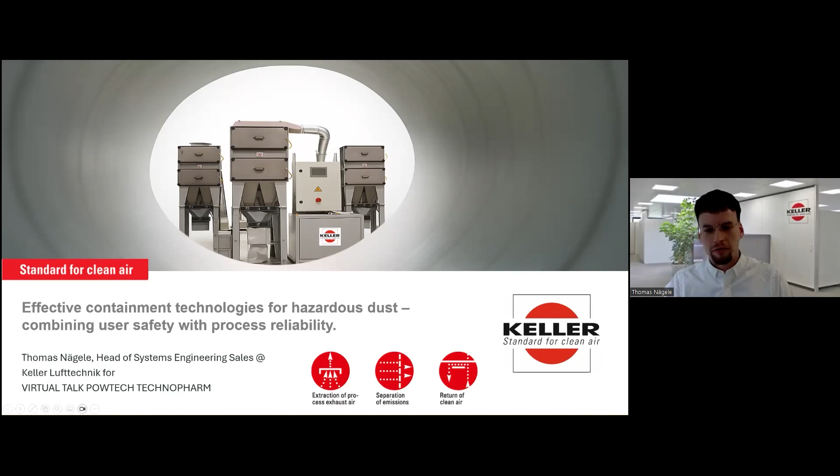On the other hand, we have a very high risk of cross-contamination, which can also cause big issues, even in the pharmaceutical industry. If the process is not working well, if the machine is dirty all the time, you get an additional risk of explosion, so you have to consider ATEX regulations, but you also have a big risk of wear of your machines, so you have very, very high maintenance efforts, cleaning efforts, and so on. For this reason, it's very important to have an overall look over the process, over all your systems, to get a solution that fits your needs, which is cost effective, but doesn't have any lack of health insurance for your workers.

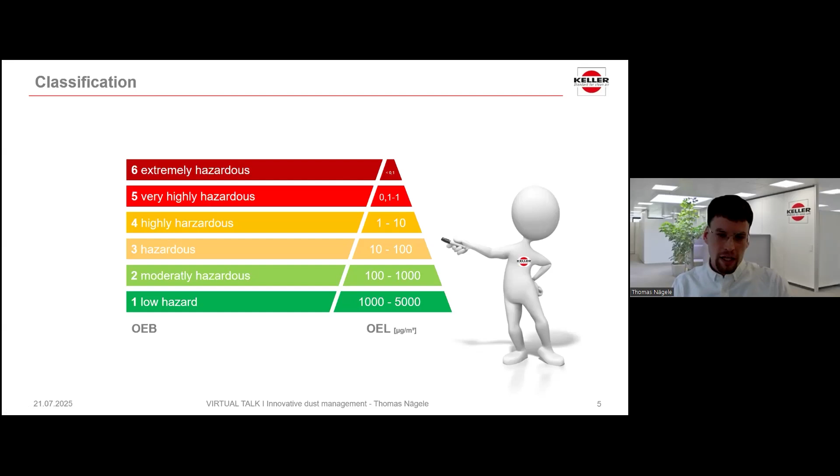Because it's much easier for their workers to say, hey, we have a new substance here in our factory and our laboratory, it's classified as OEB 3, for example, or 4, than to say, hey, we have a new substance here with an OEL level of 25, for example. Everyone knows what to do if he has an OEB level of 4. So this is the classification of dust for health. And then we have another classification, and this is the ATEX classification of your dust.

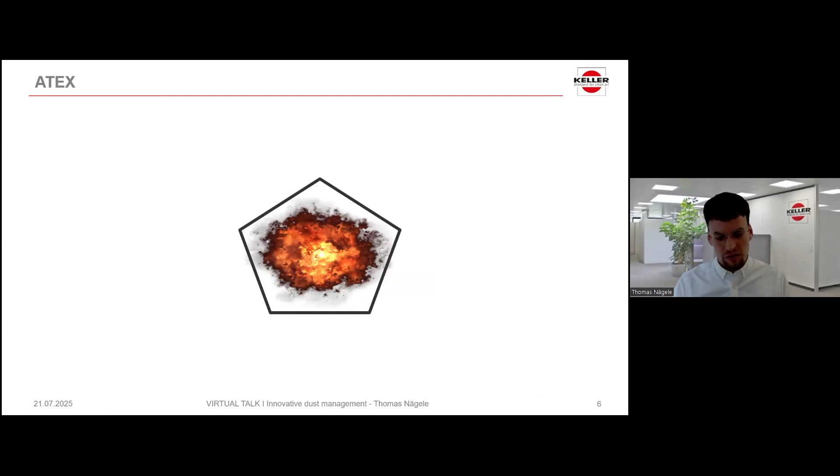First of all, what do we need to have an explosion? I'll start from the very beginning. For sure, we need a substance that's combustible. Then, for sure, we also need a sufficient degree of fineness. Everyone knows this. The correct mixture. Then, for sure, a source of ignition and oxidizing agents. If those 5 come together, for example, in a filtration unit, they can cause an explosion there.

So we try to cross out one of those points to make sure that no harm to your workers will be done. If we can't cross out one of those, maybe the source of ignition, because of a very low minimum ignition energy, we have to design the filter in a way that it's still safe for everyone to work around. So if you want to have a safe production from our side, you need to know some specific values of your dust. For example, as I mentioned before, the minimum ignition energy, to decide whether we need explosion protection or not. And then for sure, KST values and the maximum pressure for your dust.

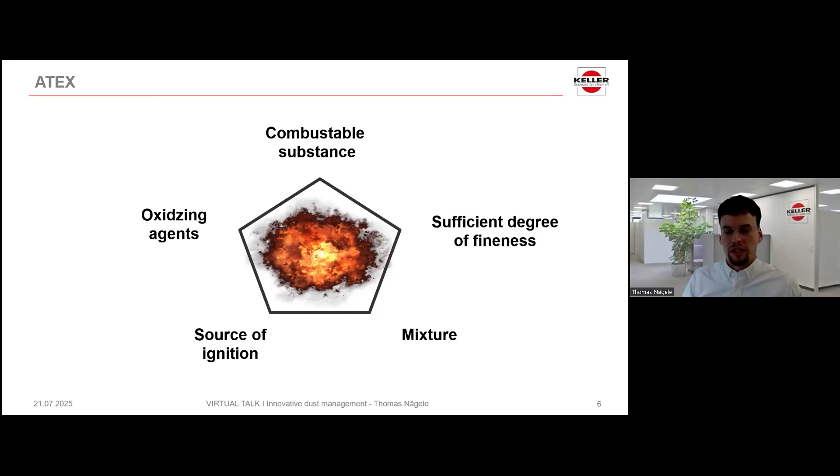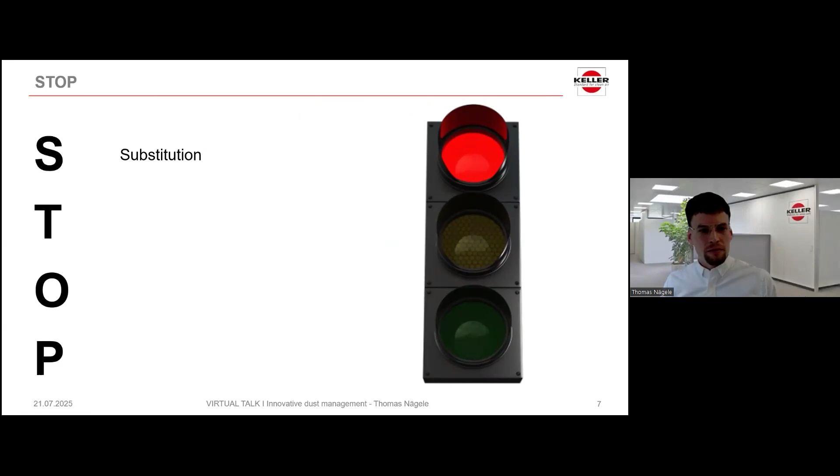So how do we bring this in? As I mentioned before, it's an overall process. The customer needs to have a look over his whole production. And there we start with STOP. The STOP principle means, first of all, you have to substitute the most dangerous substance. Then you can go for technical protective measures, then organizational protective measures, and at the very end, the personal protective measures come into account.

Since we as a filter manufacturer are only a small part of this STOP principle in the production of our customers, we are not able to substitute the most hazardous dust, for example. We concentrate on the T, on the technical protective measures, so that we bring in one of the several pieces the customer can rely on: the most up-to-date technical device with very low organizational protective measures and the least personal protective measures.

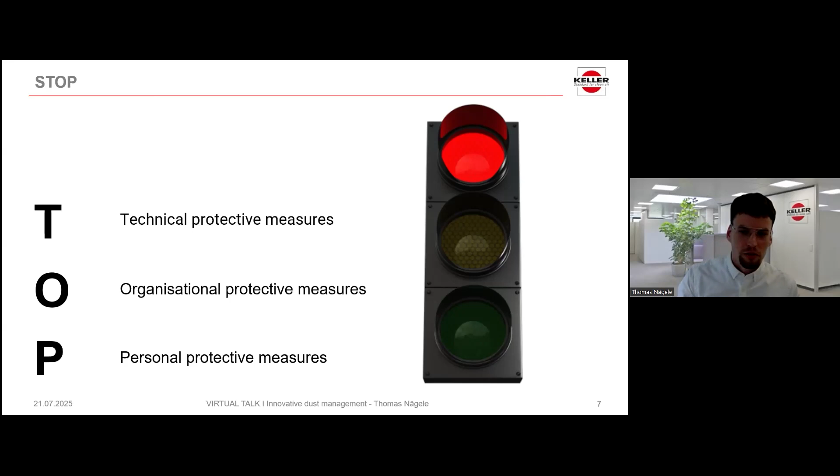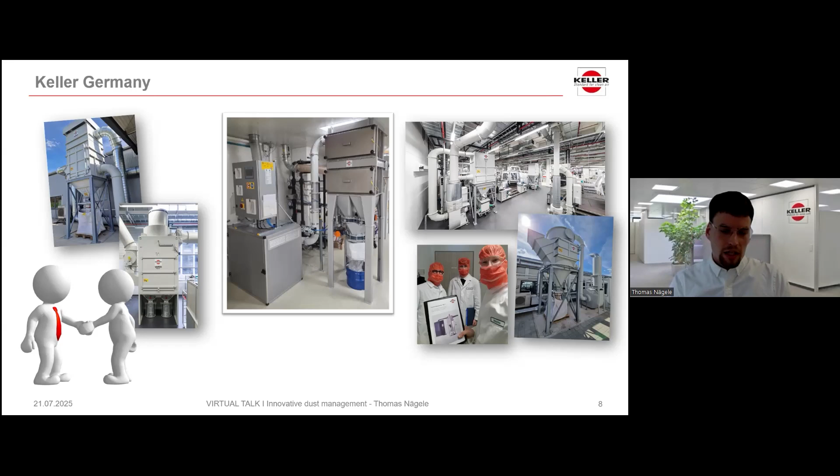So this was a quick overview of the hazards that we have in a production where a lot of dust can be exposed. We talked a lot about we, but who is we? We are Keller Germany, a filter company founded in 1903 in Kirchheim-Teck, close to Stuttgart. We have our knowledge spread over 350 employees. Our in-house mechanical and electrical engineering department brings your vision and requirements as a customer into a working product, and our installation and commissioning guys make sure that the system is installed correctly, according to the most up-to-date guidelines, and is running like 50,000 systems over the world do right now.

As I mentioned, our head office is located in Kirchheim-Teck, but with our subsidiaries in China, the US, and Switzerland, we are always close to our customers to provide the engineering knowledge needed for specific markets, so that the local regulations are met, no matter US, China, and so on. An additional very important point is service time. If we brought our service only from Germany, we would have very long travel times. So our guys in the US, China, and Switzerland have their own service department that provides very short lead times for all of our 2,500 satisfied customers worldwide.

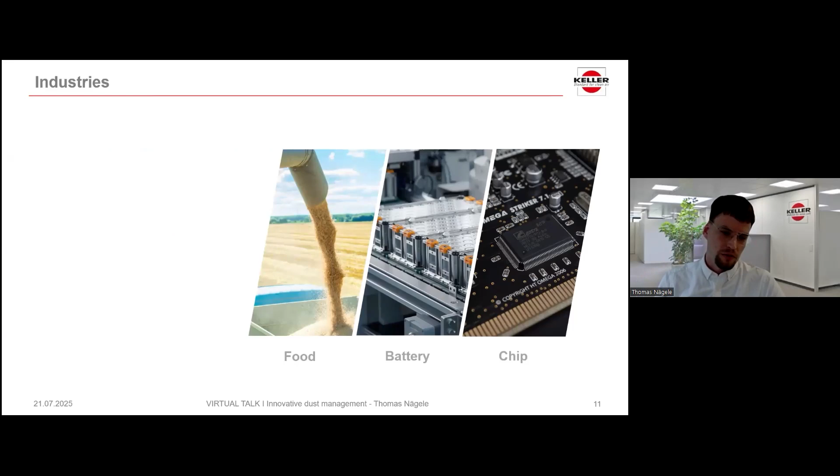Those customers are divided into several industries. Just a quick overview of some. We have, for example, the chip industry in wafer production; the battery industry, with slurry mixing, battery assembly, and battery manufacturing as an overall process. Then the food industry, where our filters are used for truck loading, ship loading, and so on. Then the chemical industry, for compounding plants, plastic plants, paint production, and mixing, weighing, and feeding for epoxy production. And last but not least, the pharmaceutical industry, and many more.

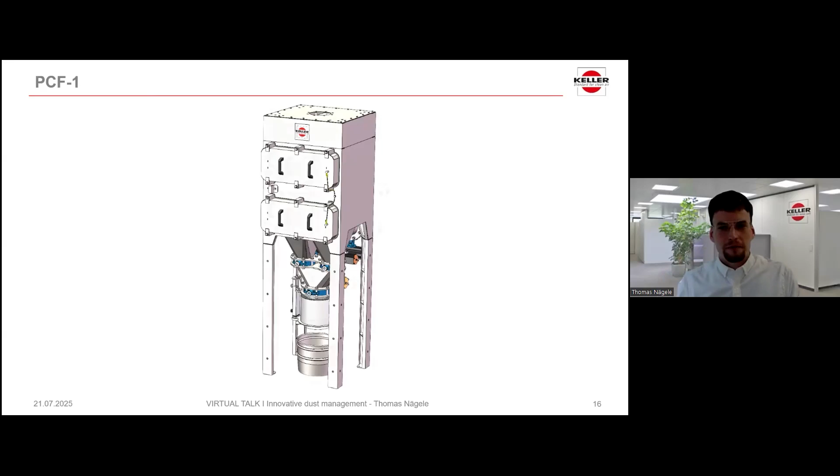And since we recognized that, especially in the pharma, chemical, and food industries, we decided to bring out our new filter, the PCF1, that meets the requirements there, with the small airflows needed, and is able to handle very highly potent substances up to OEB5 level. Inside we have 2 HEPA stages. The first one is a pulse jet cleanable HEPA stage. The second one is a secondary stage in case the first one has an issue, for example.

For the disposal, we have talked to several customers and we have focused on the endless liner system compared to several other possibilities that we have, or we could have installed, like a bag-in, bag-out with the O-ring system, but we decided to go for an endless liner system because of the easier handling, and the focus was there on the daily doing of the workers.

For sure, the O-ring handling is fine for the HEPA stages if they have to be changed, in our case, once a year, depending for sure on the process and the dust that's coming from. But the daily handling, the maintenance guys' daily work was very in focus for us, so they shouldn't need 5 to 10 minutes to change the full bag on the bottom, but 1 minute should be the maximum time

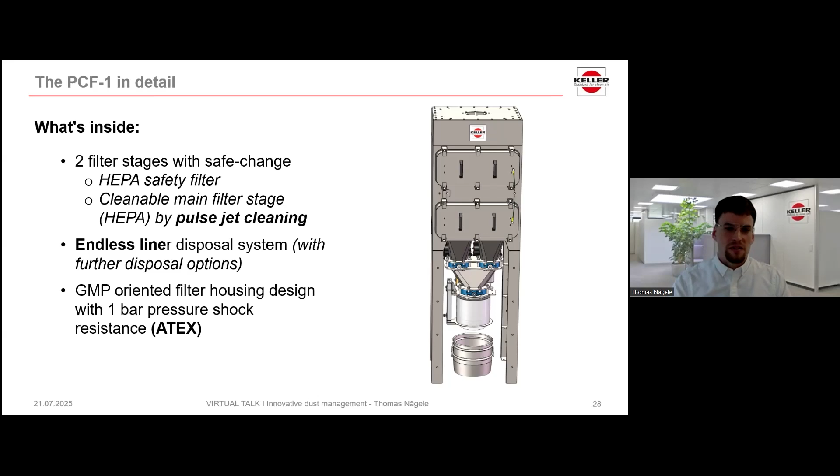that they should use. And this, for sure, GMP orientated, with a GMP orientated filter housing made in carbon steel, made in stainless steel, depending on the needs of our customers, up to 1 bar pressure shock resistance. So also suitable for ATEX dust.

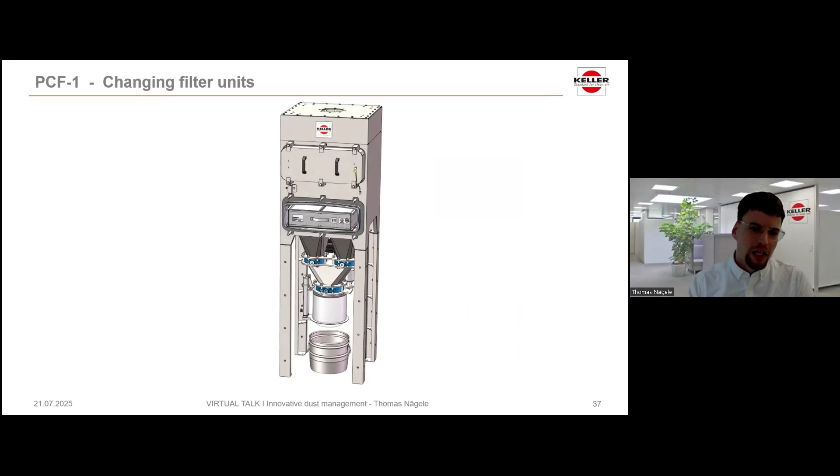Changing the filter units, easy bag-in, bag-out system. This animation doesn't show the bag at the moment, otherwise you wouldn't see anything. Filter elements out, new one in, and the same with the endless liner unit. Big benefit of the endless liner unit is you have the O-ring handling just once a month, and the daily change, as I mentioned before, is done in a very, very short time.

1 minute. You just have to toss down the endless liner, crimp it with a Lugaya system, depending on the OEB level that is required for your process and for your personal safety. But with a Lugaya system, we can go up to OEB 5. Just toss it down, crimp it, and production can go on, and this is done in less than 1 minute.

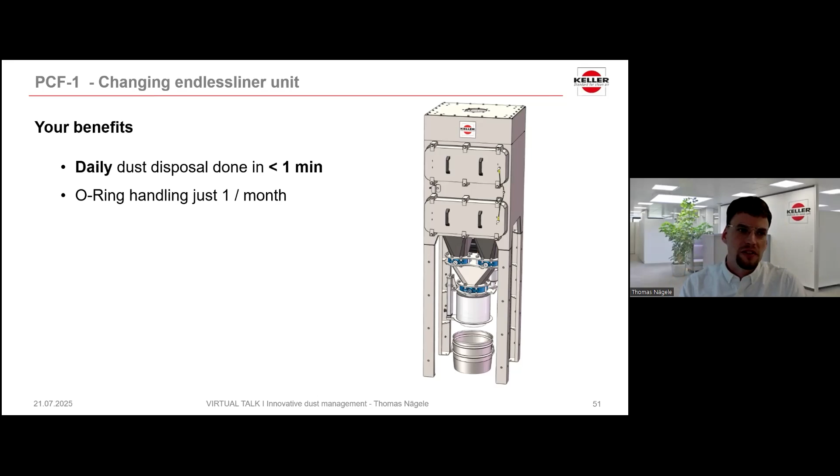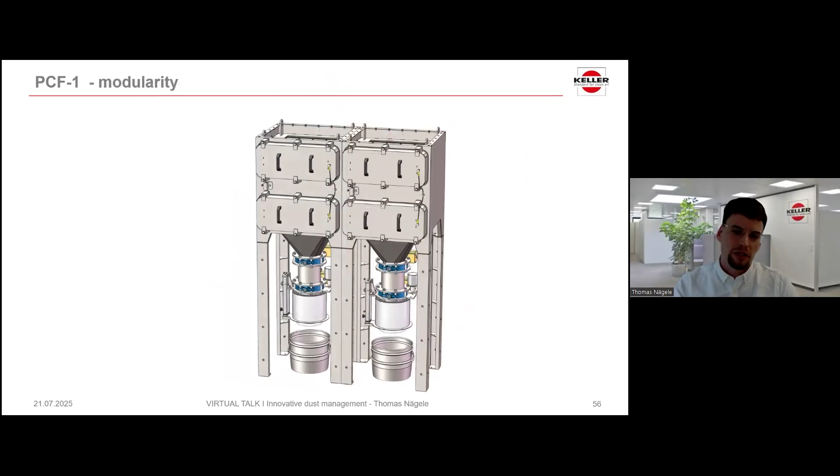And I've mentioned the modularity, or the small airflows that the PCF1 is designed for. So we can bring it up with a top-mounted fan. If we do not have the height, we can place the fan beside. If one PCF1 is not enough, we can just bring several in a row to fit the customer's needs. And this is not the only thing we can do.

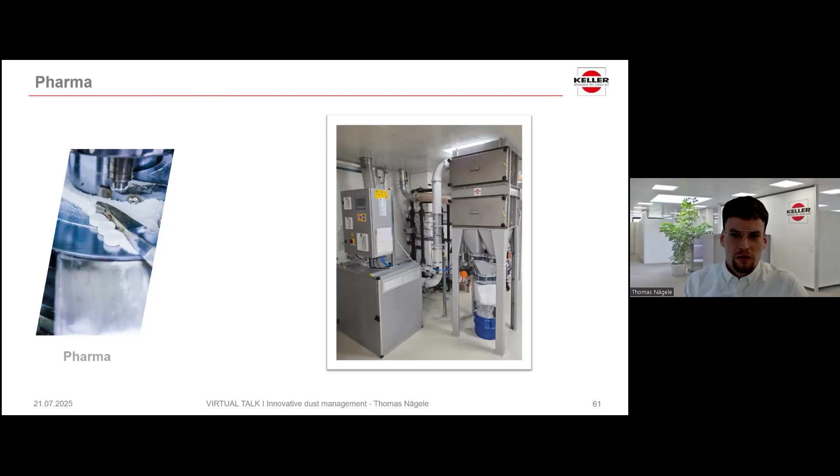If the PCF1 is not working or is not the right filter for your process, because maybe you do not have the ATEX requirements, we can go for several other possibilities from our portfolio. Just a quick overview for the main industries that we have right now. For the pharmaceutical industry, we have the PCF1 for sure, placed at a customer with a beside placed fan so far. Then for chemical industry, in this case plastics production, several tons of plastic are produced in this facility.

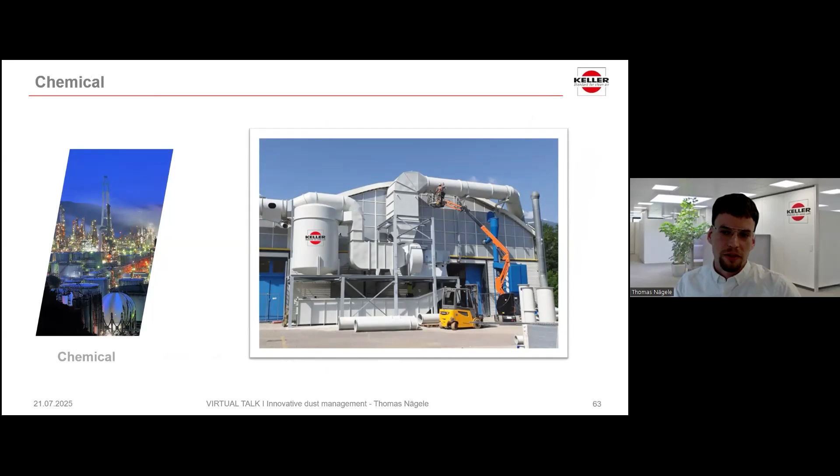We have an airflow for the PCF1 of roughly 700 to 1000 cubic meters, and the system here has 56,000 cubic meters per hour. So from small to big airflows, we have a very high range. Dry filtration systems, but also wet scrubbing systems. In the food industry, we have set up several filters for ship unloading, truck unloading, food processing,

and so on. Battery, most of those filters are used for slurry production, where all the critical masses come together with the solvents, with the lithium, which is very dangerous during handling. And in this case, because the airflow of the PCF1 was not enough, we chose a standard dry filtration system and equipped it with an endless liner unit at the end.

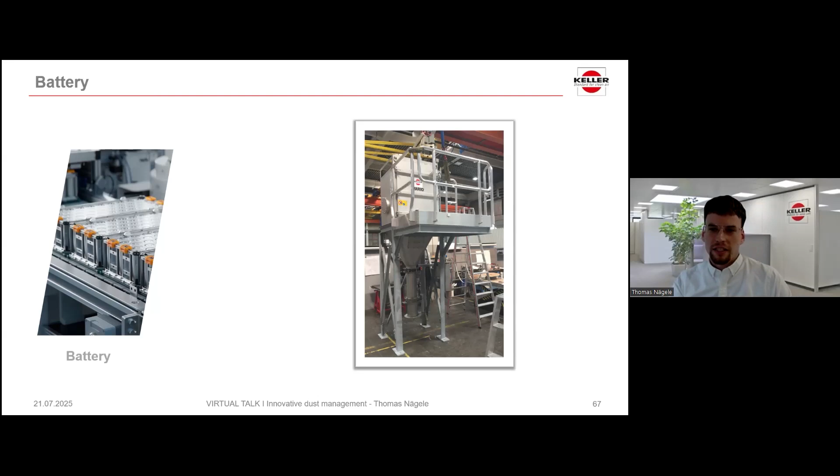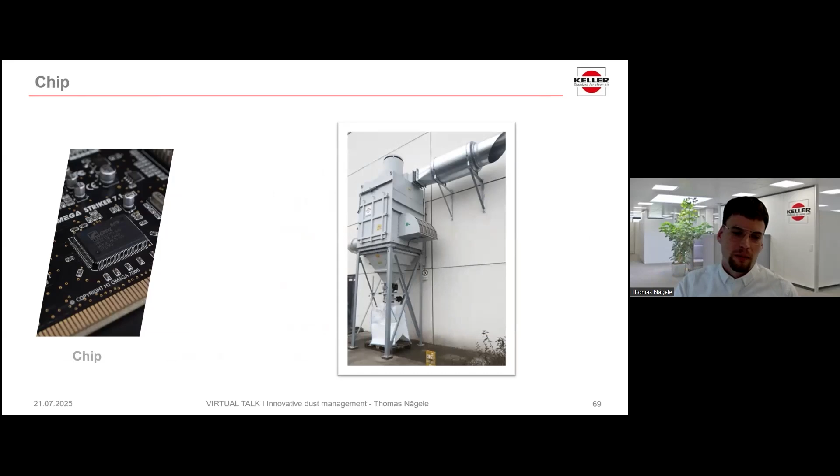And also chip industry, also here we have the ATEX version with a Rembe explosion device, back flap on the inside, and a big bag on the bottom. So this was a quick overview. We have effective containment technologies, and for this, I wanted to show you

what kind of dangers and hazards can show up during a process, during a production, what is important for us to know. And if we have all the information that we need, we can provide to you a GMP-conform system, which is able to get up to OEB 5 and ATEX conform. Industry 4.0 is a very, very important point so far, which also has influence on the safety and operational style of your process at the end.

I didn't mention it in the presentation so far, but as I said before, the electrical design department is in-house, so we have the possibility to connect all the systems for you as a customer to your needs. You can get a message on your mobile phone if you like to, if the filter needs to be changed. And as far as you allow and as far as you want to, we can sum up all the information and make it visual for you.

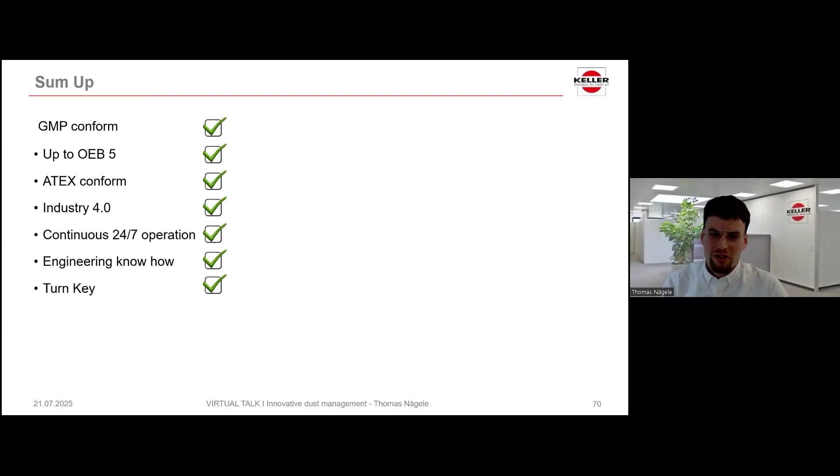So with this green, with these points, we can change the stop light to a green light with the Keller solutions that fit your needs.

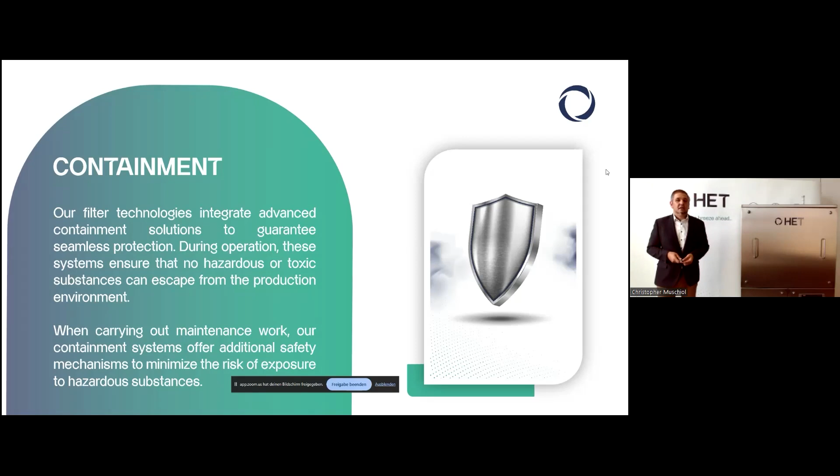And together with the containment, the pharmaceutical industry always looks for a GMP compliant design, because we are not able to deliver a machine, a device, and that's all. We have to ensure that the machine or the dusting equipment, any machine delivered into the pharmaceutical production area, has the right functions, has the right performance, and it has to be qualified and validated. Only the right machines can, at the end, produce the right medicine. So together with the HEPA filtration and the containment, the GMP requirements are really necessary.

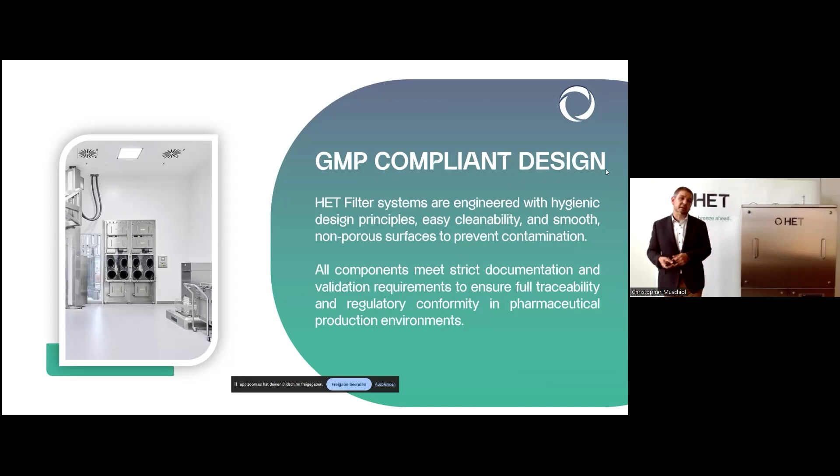And last but not least, what we are also doing is explosion protection, because powders and dusts are generated in the pharmaceutical industry. They are mostly combustible, they are at the end also explosive, and that means we need explosion protection by design on filter systems, but also on other production machines. That is also necessary.

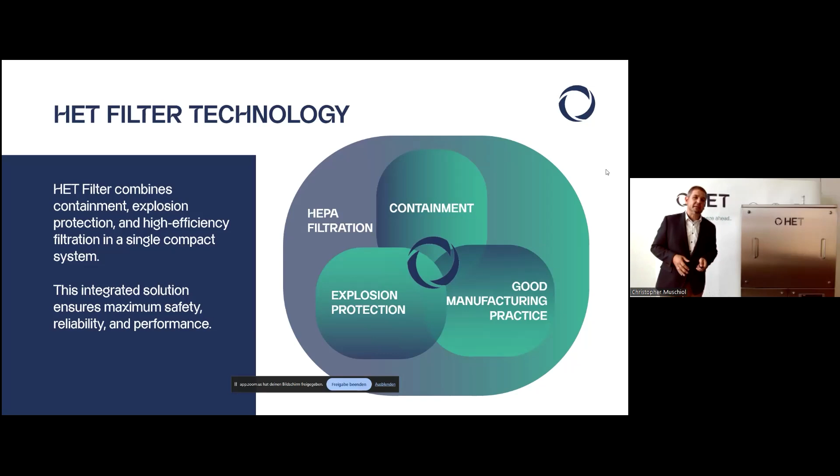And all those 4 technologies are necessary to plan the right dust collection process in the pharmaceutical and also in the chemical industry. And all those 4 technologies are combined in one HET Filter system. That's what we are doing mostly with our systems. All of our systems have all of those 4 technologies in one device. But let's go and talk a little bit deeper into the containment part.

And there's also a keyword: 1 microgram per cubic meter. This keyword is also a requirement for many pharmaceutical companies, what a device, a filtration system, or a process is able to achieve. So most of our customers say, okay, when you deliver a filter system, there should be an exposure of not more than 1 microgram per cubic meter for an employee.

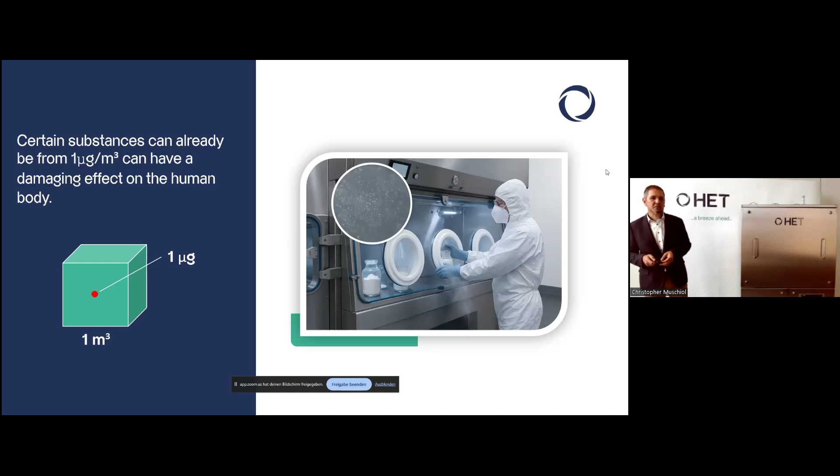But at the end, what is 1 microgram per cubic meter? It sounds not like much. It's not a high amount. When I'm talking to our customers or colleagues: if you see the dust, it's the end. It's too much. 1 microgram per cubic meter is so little that you are not able to see it, and you cannot weigh it. You cannot imagine it. So I have a short example of how to imagine 1 microgram per cubic meter.

You can imagine a heaped tablespoon that has a weight of about 20 grams. And now you pour that tablespoon into the biggest building in the world. I don't know if everybody knows the biggest building in the world. That's the New Century Global Center in Chengdu in China. It has an incredible volume of about 20 million cubic meters. It's 400 to 500 meters long and 100 meters high.

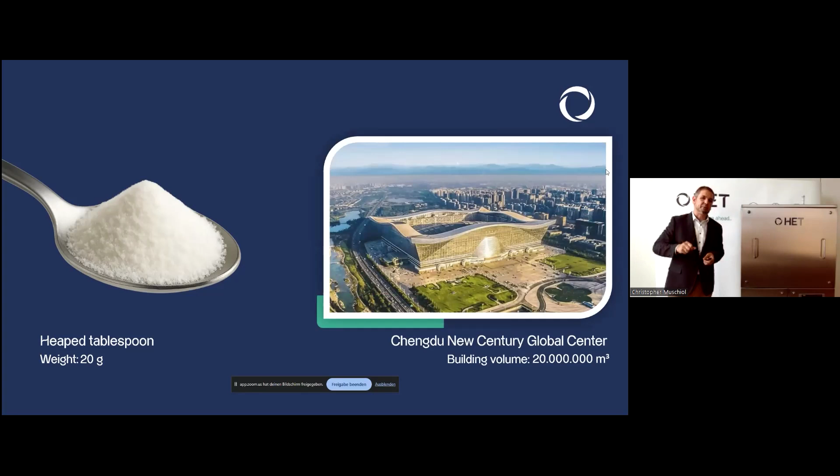And you pour that small amount, that heaped tablespoon, into that building. That's at the end the same relation, the same ratio, as 1 microgram per cubic meter. So it's really, really small, but it's a requirement we have because substances like cytostatics or other medicines can damage the human body in such small amounts.

Of course, not directly. If you are exposed to 1 microgram, you are not falling down and dying, but it goes constantly, day by day, week by week, year by year. And at the end, after some years, you have a health problem. And that's why there are requirements on such substances, which are necessary to protect human health, to ensure product safety, of course against cross-contamination, another buzzword, and to prevent environmental contamination.

So yes, even the smallest exposure can be harmful. That's important with the containment, and containment are all measures to prevent or to protect those employees against those substances. How does that work in practice regarding dedusting machines? So now we can imagine here something like a pharmaceutical production line. We have an isolator, a weighing isolator. We have a fluid bed dryer, tablet press, and a drum coater and everything else.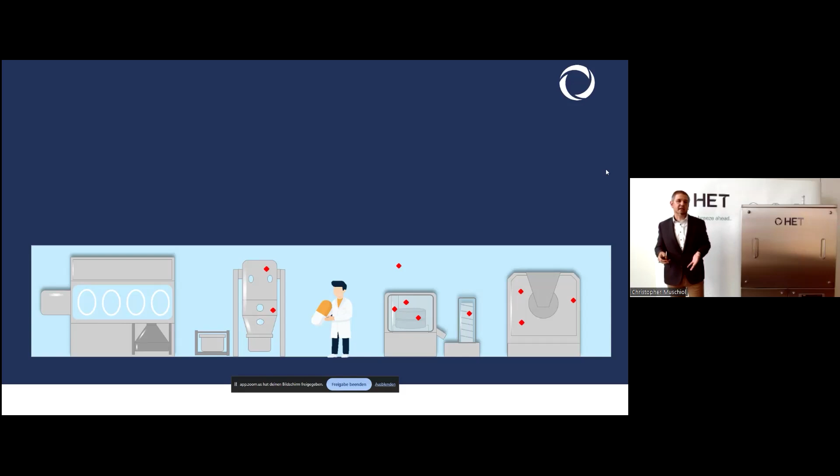And in that production line, medicines are produced. There are active ingredients. And of course, from time to time, there could be a leakage or there could be a contamination. And to prevent that contamination, you need dedusting equipment. Of course, you put a technical area on top, put a big dust collector on it. You connect all those machines with the dust collector, and the dust collector sucks all the harmful air, all the dusty air into itself, filtrates it, and lets the clean air out. So that's all, isn't it?

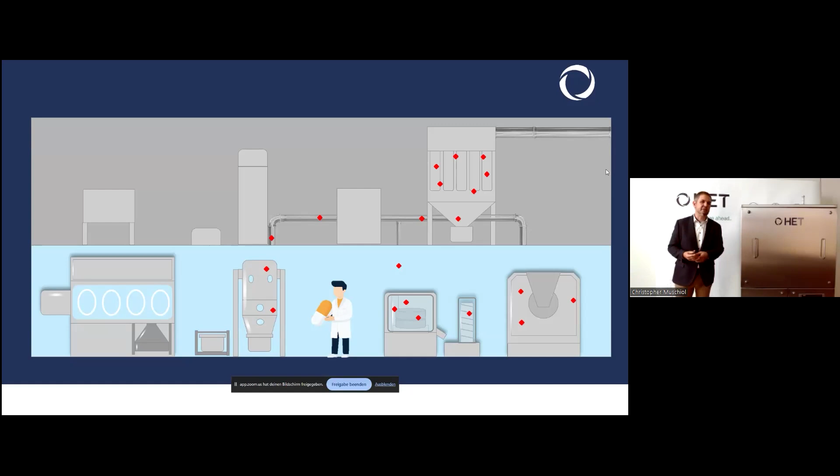No, not really. Because what you are doing now, if you have a process like this, you put the risky dust, the risky substance from a clean area, from a clean room, which can be cleaned really, really well, into a technical area, into a dust collector. And during operation, of course, dust collectors are really, really tight because they are working in vacuum, so when there is a leakage, the vacuum sucks the air in and the dust stays in. But of course, from time to time, you have to do filter changes. You have to do dust discharge. You need to maintain such dust collectors.

And then what we are seeing, what most of the companies do, is they put their workers into PPE, personal protective equipment, and protect them against those substances. And when they are doing the filter change on a dust collector, of course, they are protected. But the environment of the technical area is contaminated, because on normal dust collectors without containment measures, the dust and the harmful substances can go out and fly through the technical area. And everybody in the pharmaceutical industry knows how long dust particles with a diameter smaller than 1 micrometer can fly through areas. They need weeks to fall down. And before that, you're not able to clean such a technical area.

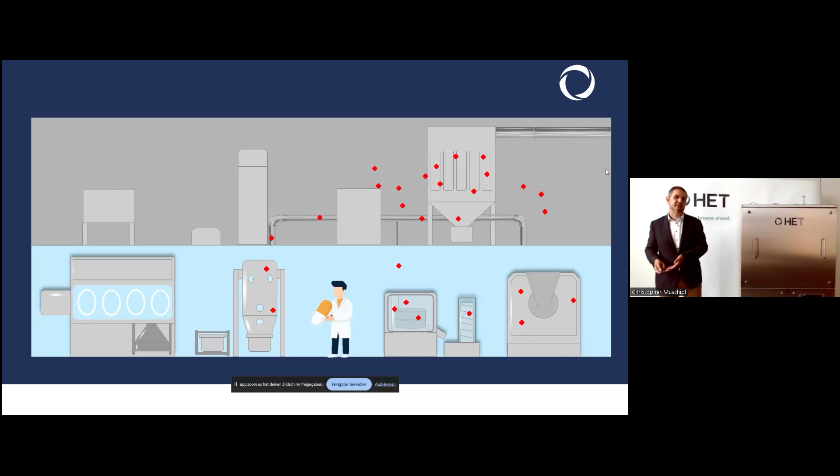So when the worker is finished with his maintenance or his filter change, the dust stays in the technical area. And after that, if another person comes for an audit, or has to repair another device, he is directly in contact with the substances in the technical area.

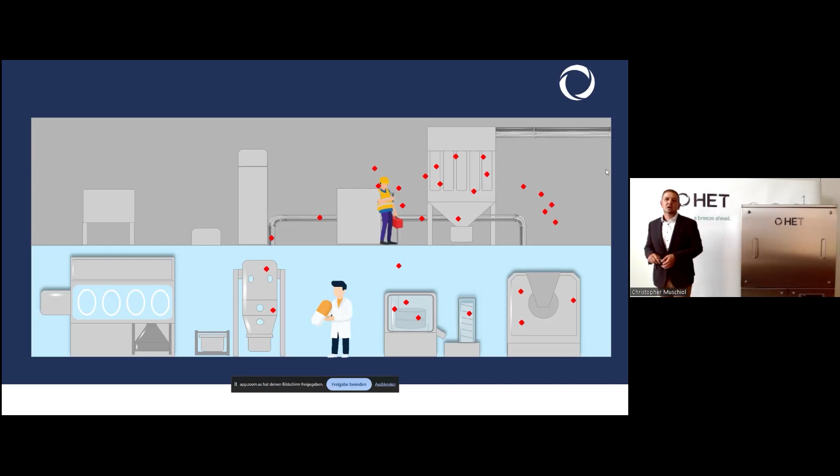So, as Mr. Nägele mentioned, we are also working with the STOP principle. We have the same solution concept. We try to follow substitution, technical measures, organizational measures, and personal protection always as a last resort. And first, we are looking for technical measures, because substitution is a little bit more difficult and not always possible. So we are working with technical measures, and after that, with the organizational measures.

And how should it look in the right way? We follow the principle that you need the right dust collection system, the right filtration system for the right pharmaceutical process. So each process machine is equipped with a dedicated dust collector with the right technical containment measures. And we also consider that you don't always have to place the filter systems in the technical area. You can also execute those systems in the clean room, of course, with the right execution, like in stainless steel and GMP compliant. Also mobile for difficult processes.

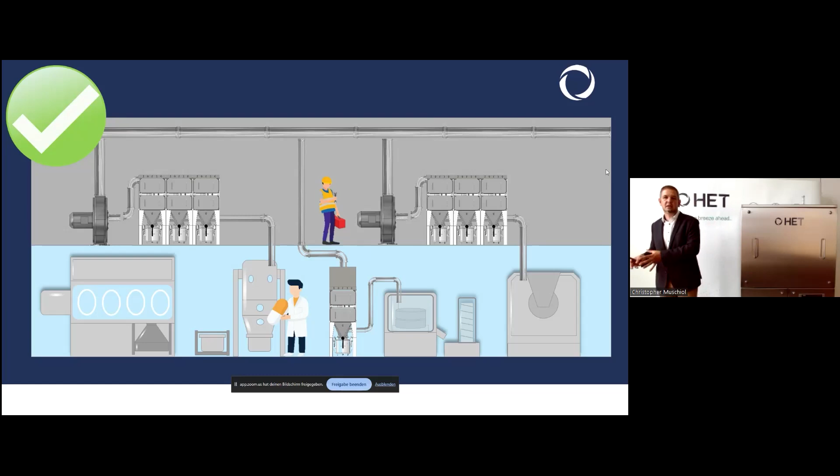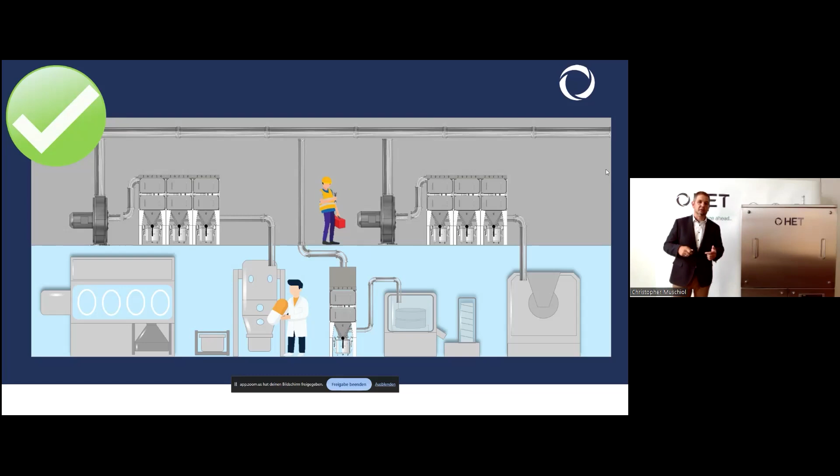And then you have the right dust collection solution for every process. And you can also choose the right containment measures for the right processes. For example, you need other containment measures on a drum coater than on a fluid bed dryer. Regarding explosion protection, it's the same way. You can look for the right explosion protection for the dedicated process. So as a conclusion, personal protective equipment should always be the last resort for the protection of employees and the environment. And a suitable exhaust air concept for process plants leads to safe removal of hazardous exposure.

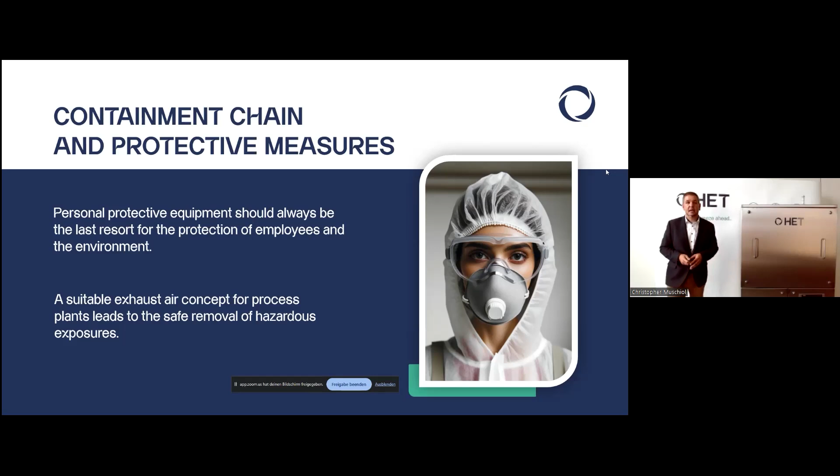What I am talking about is also written down in a handbook. From the ISPE, there are really, really good handbooks regarding containment. They are available in German and also in English. And if you are more interested in containment regarding dedusting systems, there's a whole topic, everything about containment on dedusting systems, but also containment on other process machines like tablet presses, other procedures, GMP compliant containment, and many, many more.

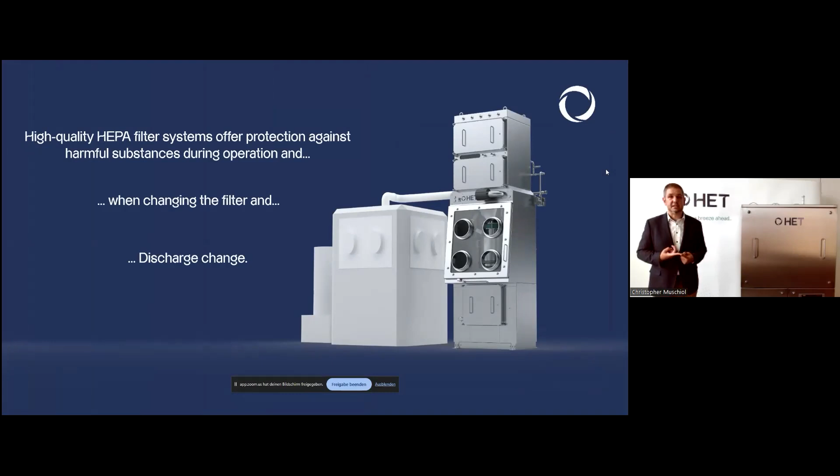It's a really, really good handbook, and I can only recommend to have that on your desk. So let's get a little bit more detail into what are containment measures on filter systems. And of course, if you want to use filter systems in your pharmaceutical production area and you want to put it into your containment chain, you have to consider two main procedures. That's the filter change and the dust discharge change.

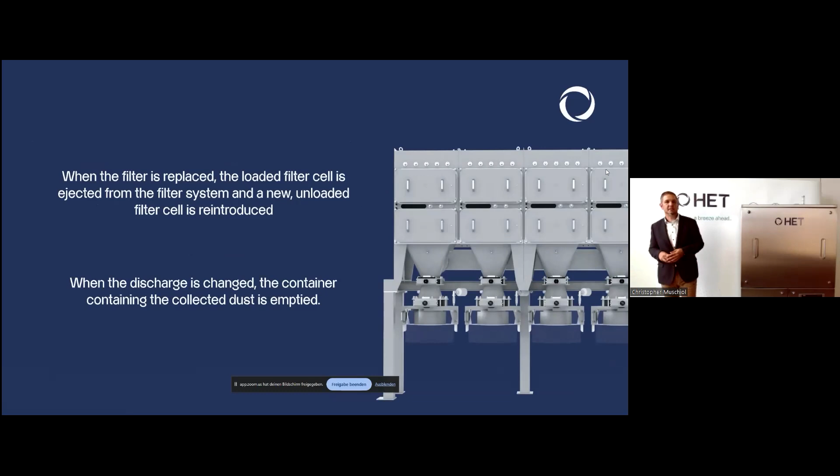If you change the filters, you replace the loaded filter element and put a new unloaded filter element into the filter system to ensure that we always have the right filtration efficiency. And when the dust discharge is changed, the container which contained the collected dust has to be emptied. And there are, of course, many possibilities for the filter change. We are working with the safe change principle. We do it in dry containment up to an OEL of 1 microgram per cubic meter.

So we change the loaded filter by using a plastic bag, where the loaded filter will be put in, and we cut it off and put it away, and we put a new filter element with a new plastic bag and bring it into the filter housing. When we are lower than 1 microgram per cubic meter,

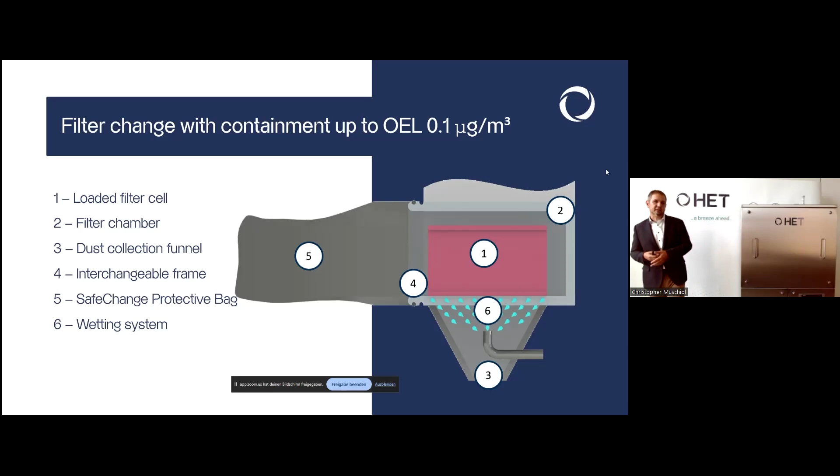we also do the safe change, but prior to the safe change, we wet the raw gas area of the filter element, and we make everything wet to prevent dust becoming airborne in the filter housing. So by using a little bit of water, also steam can be used. By using water, we have not so many particles flying around inside the plastic bag, and we ensure a higher safety in the containment measures. That can also be done for the dust discharge, of course.

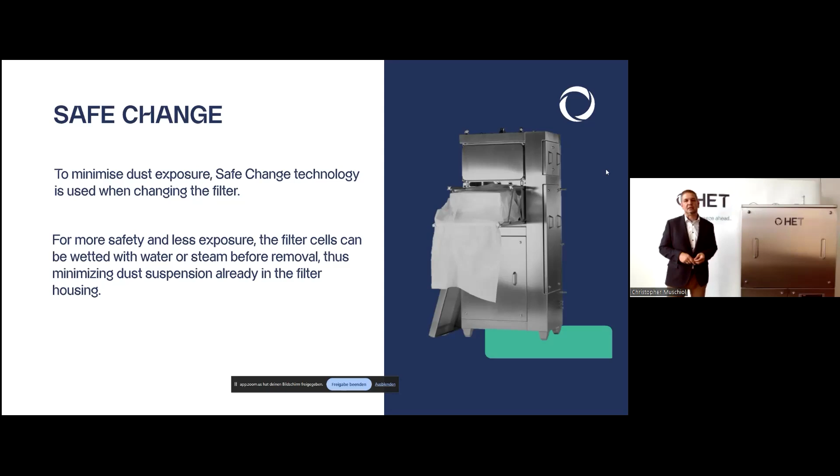And for the dust discharge, we also have endless liners, but an endless liner also has to be changed via the safe change principle at the end, because an endless liner is not endless, it's only a long tube. But the dust discharge can also be equipped with, for example, containment flaps, pneumatic conveying systems, and much more. And if we have higher requirements in the dust discharge, we can put a whole glove box, a second barrier, around it, to not come in contact with those harmful substances.

As a conclusion, we are talking about pharmaceutical dedusting systems. When they handle harmful substances or active ingredients, they have to be put into the overall containment strategy. It's not possible to put some deduster on top of a building and say, okay, that deduster sucks everything up and then we are fine. You need to consider maintenance, filter change, and at the end protect your employees. As already explained, technical containment solutions are preferable to personal protective equipment. And cleaning such technical areas is much more cost effective.

And therefore, some filter systems could also be placed into the clean room or something in between. We also have through-the-wall solutions where only the front, with the filter change and the dust discharge, is in the clean room, and the back of the filter system could be in a technical area, depending on the building. And integrated filter systems, with high-end HEPA filtration, containment, and explosion protection for the pharmaceutical industry, are the best way to have your pharmaceutical process safety.

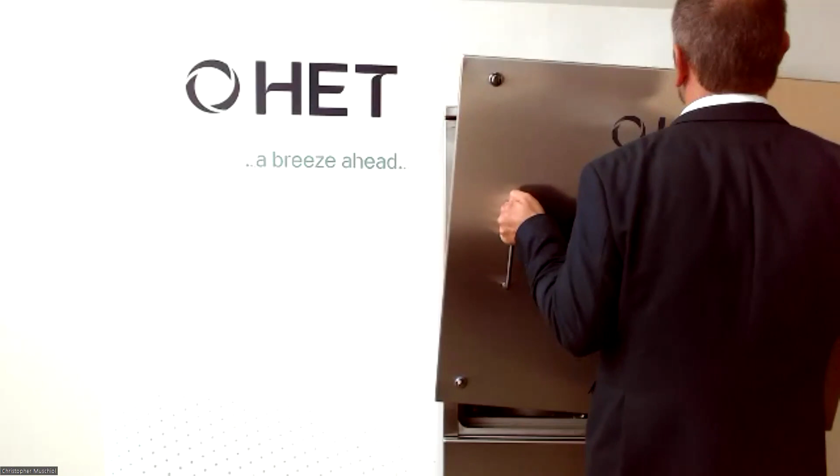Okay, the system you have on the picture, we also have here beside me. I only want to shortly explain it. That is our so-called HET compact filter system. It can be used in clean rooms and production areas, because it's completely in stainless steel. It's completely mobile, and this system is able to handle up to 500 cubic meters per hour. It's perfectly suitable for small tablet presses, small process machines, R&D solutions, or working benches.

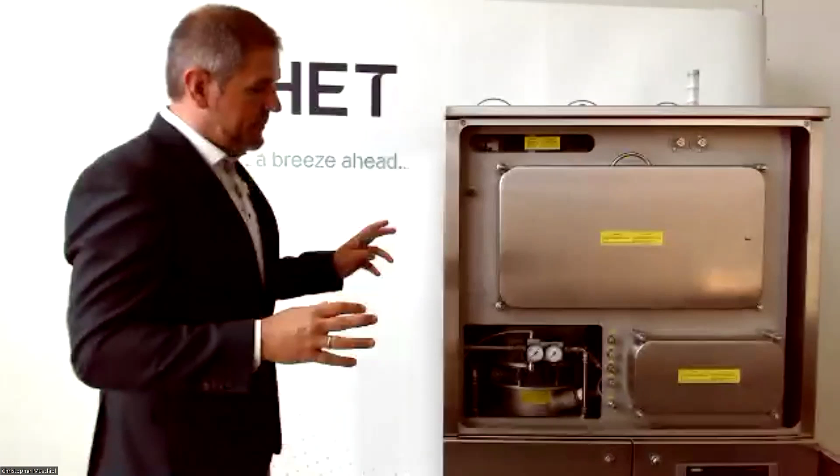The main point of the HET compact is that everything a filter system needs is in one housing. We have 1, 2, 3 HEPA filter stages. The first one is also cleanable. It's not a jet pulse system, it's a smoother system which cleans the filter in a really silent way, but compressed air is needed. Then we have a dust discharge, a fan, and the complete control system. So it is a completely compact system. We have a raw gas inlet and clean gas outlet. It's mobile, you can move it from room to room and use it for dust collection in the pharmaceutical industry.

Okay, I think that's all what I wanted to tell you, and hopefully you understand me in a good way, and you imagined the importance for employee protection, and I'm free for any questions.

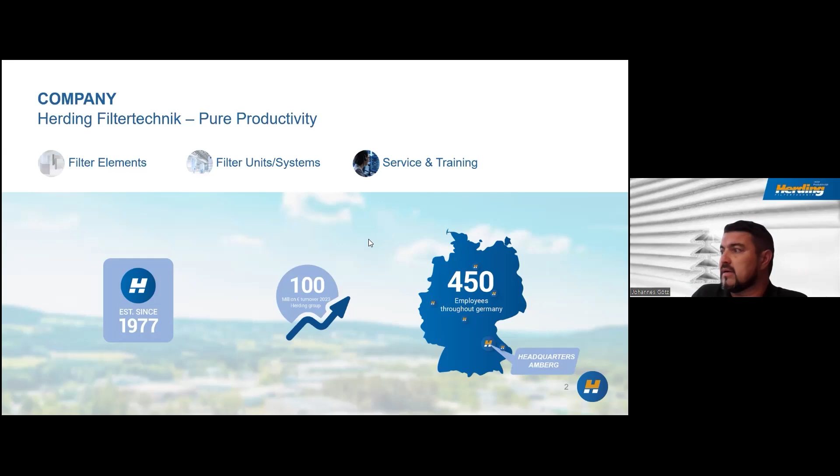Okay, on the company, where are we located? It's just a small add-on. We are globally networked. We have got own divisions in Europe, in the United States, in Asia. The latest one was founded in India last year. In China, we are since the beginning of the 2000s. And next to that one, we have got a network of partners all over the world to cover the markets where our customers are.

Our customers, we try to work on many feet. We are working in different applications: additive manufacturing, battery, minerals, chemical, pharmaceutical industry, laser processing. So I saw from Mr. Nägele and Mr. Muschiol, there are some things the same. So this means we're working on the same physics. I'm just putting a little bit of a wider look outside of pharmaceutical industry and the high hazardous dusts in terms of high potent pharmaceutical ingredients or other very toxic measures. But there are also other hazards coming. So I will touch similar things as the previous speakers.

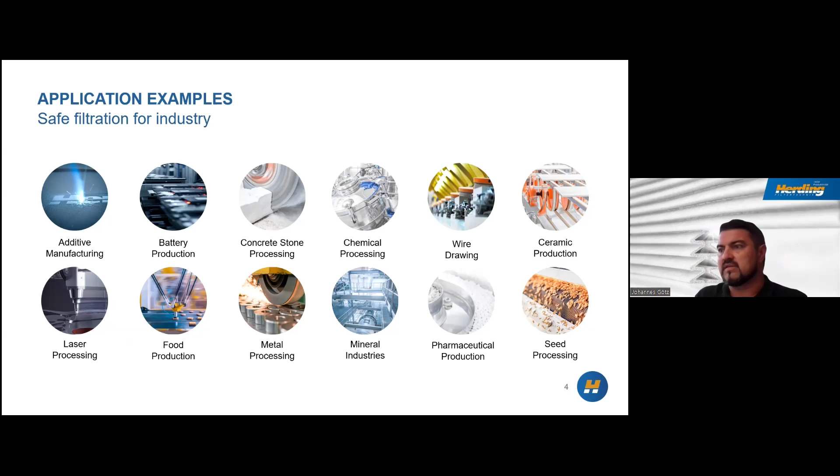Yeah, when I talk about filter units, I think the reason why we use filter units is clear. First of all, and this is the basis of all, we have to remove particles from gases. This means protecting man, protecting environment, protecting machine. This has to be done within all the norms that are applicable, be it the European Machinery Directive, be it ATEX, be it ASME, NFPA, all these regulations. And the crown of that one is if you do that in an efficient way. And an efficient dust collector, what does this mean? There are different aspects that are important to know and that will be touched in this presentation.

First of all, it's the filtration efficiency. This means we have to reliably separate dusts, fine dusts, very fine dusts, abrasive dusts. We have to work on constant pressure drop. We have to work without interruption of the process. We have to do it energy efficient, so use as low as possible electrical and pneumatic energy. We have to consider safety. We have to apply smart safety concepts for explosion, for fire, for the hazardous dusts.

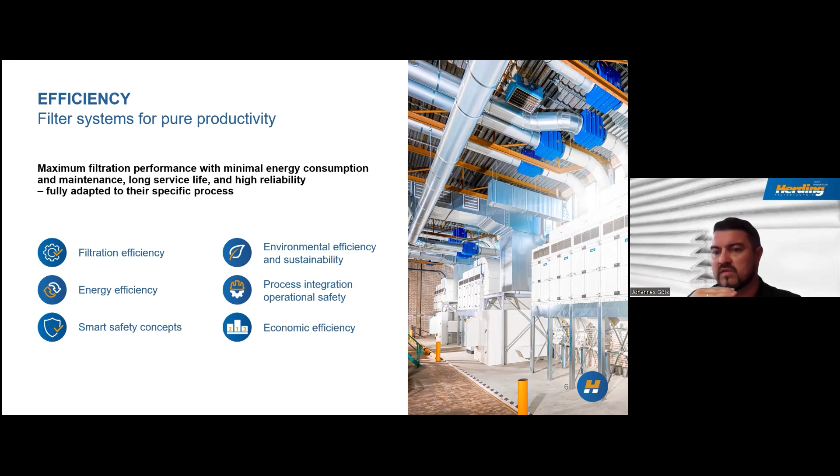We want to stay environmentally sustainable. This means the effects on the environment must be reduced, be it by low emission rates, be it by the composition of the materials, be it by long lifetime. And of course, the key that the operator is finally happy is if the system is perfectly integrated so that he can run his system on the same conditions all the time. And the next part of the presentation is just showing the different aspects of that one. Basically, you look into a flow sheet, this is a filter unit and doesn't look that complicated.

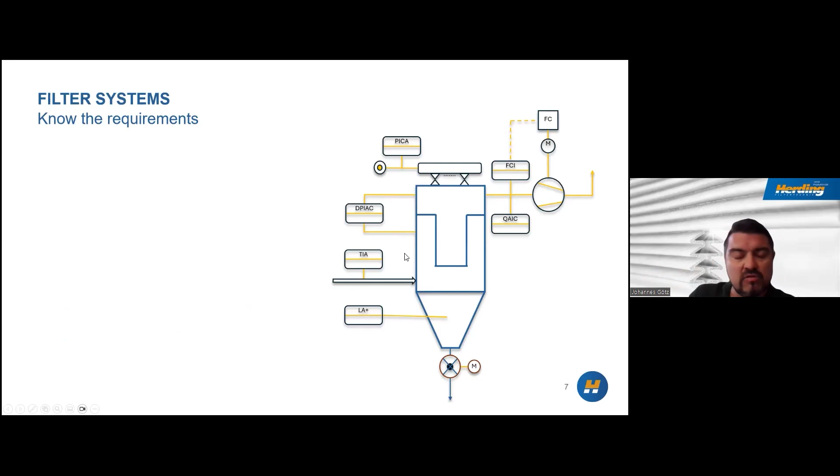I think I repeat what my previous speakers said, but in the end, there are a lot of factors to be considered to choose the correct filter system that would work perfectly and will also bring efficiency to your process. So this normal flow sheet can look in reality like this one. These can be round filters, big filters, bigger filters, filters with a lot of reinforcement, small units, round filters, silotop filters. So there's a huge variety.

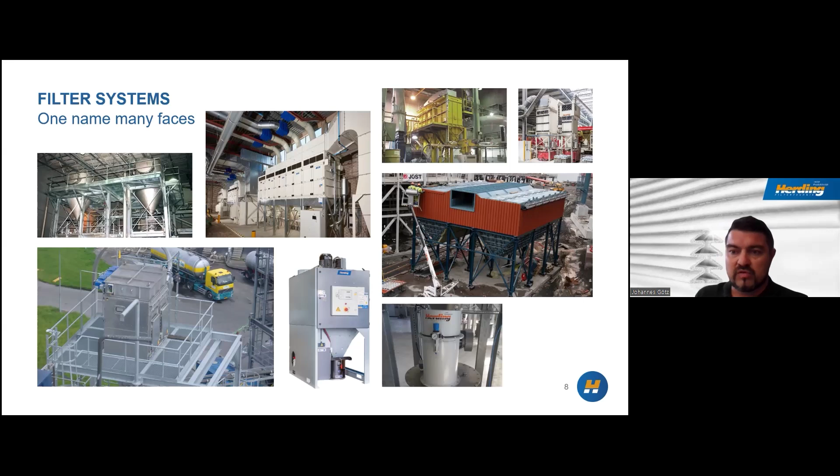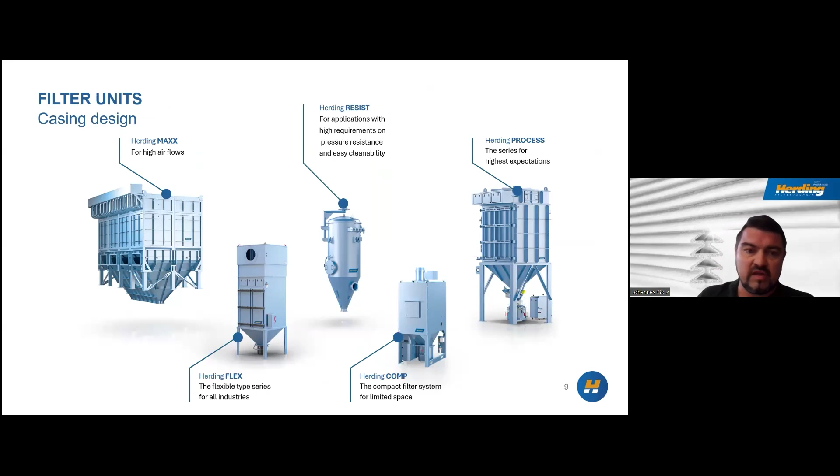And so to find the right one for your system requires knowing the process. And then you can go on selecting the equipment you need. Let's start with the casing. The basic differences are round and rectangular designs. I've got here an extract of the type series we have got. You also see some information, the key features of it. What you see is pressure is an influence, space is an influence. The kind of equipment you have to attach is an influence.

And I have just mentioned here a few. The list is of course not complete. You have to know the required vacuum to choose the right fan. You have to know the pressures to know what kind of casing you need. The product load means to consider in the design to make a pre-separation. The discharge system must be able to handle the high rates.

Abrasive dust is always a topic on the casing, on the filter elements. If you want to have product recovery, you don't want to contaminate the product. This means you have to keep surfaces in certain conditions. You have to have an eye on combustible and explosible dusts. Sticky dust is a big challenge for filters. We have a very good solution for that one.

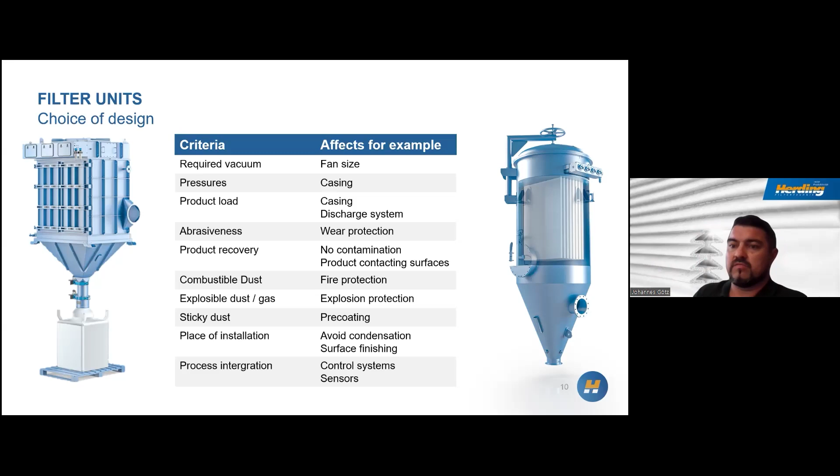Place of installation is important in terms of temperature. If you install it outdoors, you have to avoid condensation, to avoid humidity. Humidity and dust is not always a good combination. And finally, the process integration. This means the control systems of your system and the filter unit must work together. So the interface has to be the correct one.

When we talk about the casing, we have to go the next step to the inside of the filter, and this is the filter elements. Of course, I'm focusing here on the Herding filter elements. Herding sinter plate filters are a big name on the market. They are known for the long lifetime, 10 years and more for a set of filter elements is not a big deal for us, happens all the time. Very important, constant operating conditions.

The pure surface filtration will provide operating conditions that are stable, the pressure drops. The clean gas values are typically very low on the normal filters, smaller than 0.1 milligram per cubic meter on this filter stage, resistant to chemicals, and the rigid body design makes it very durable. And as it doesn't contain any filaments and fibers, it will not contaminate the product in the filter by any kind of loosening materials.

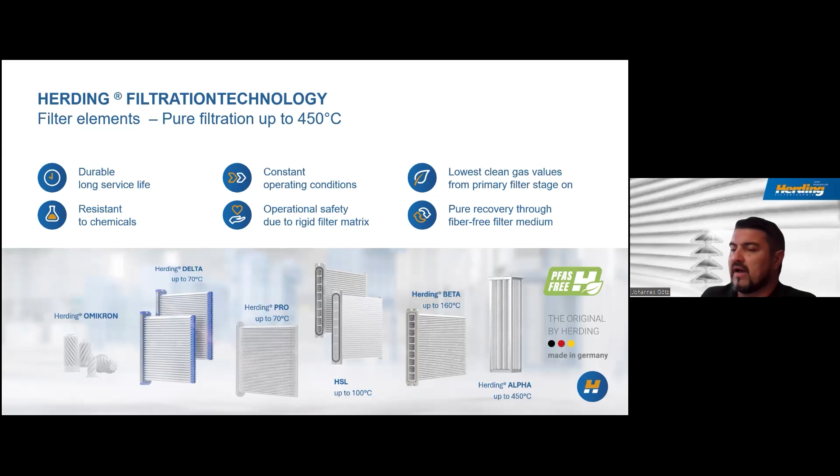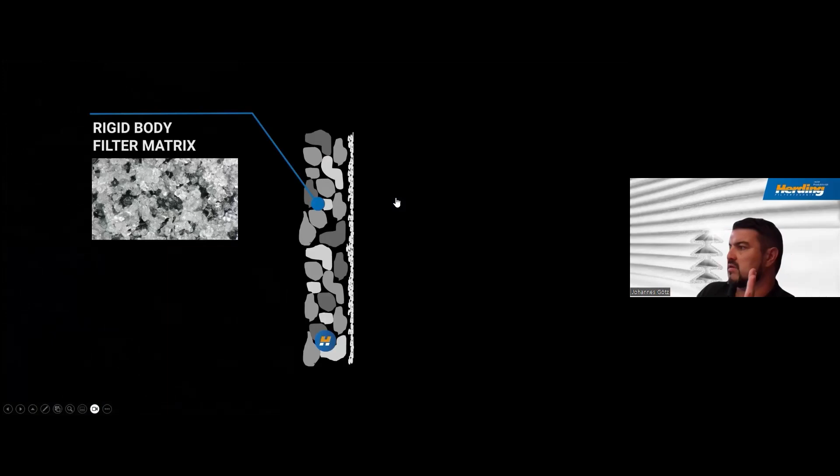There's a small film in here which shows what surface filtration is. This means dust particles are collected only on the surface of the filter and then get knocked off again. How is this done? We have got a rigid body, that is the carrier, and an embedded microporous surface coating, on which the actual filtration takes place.

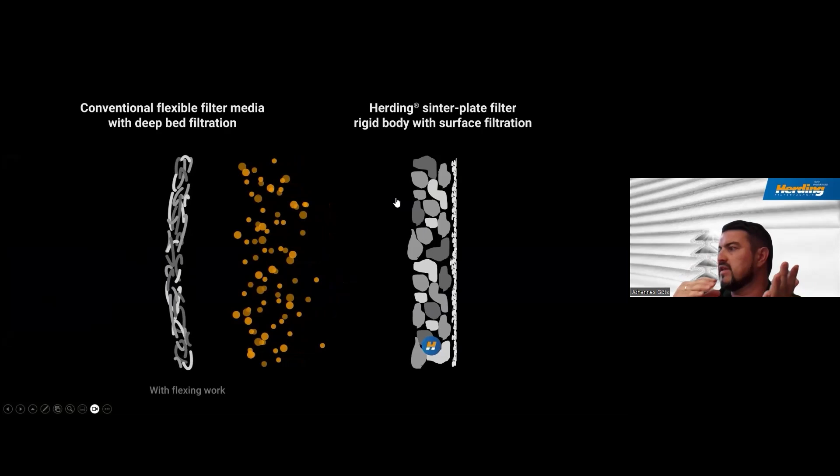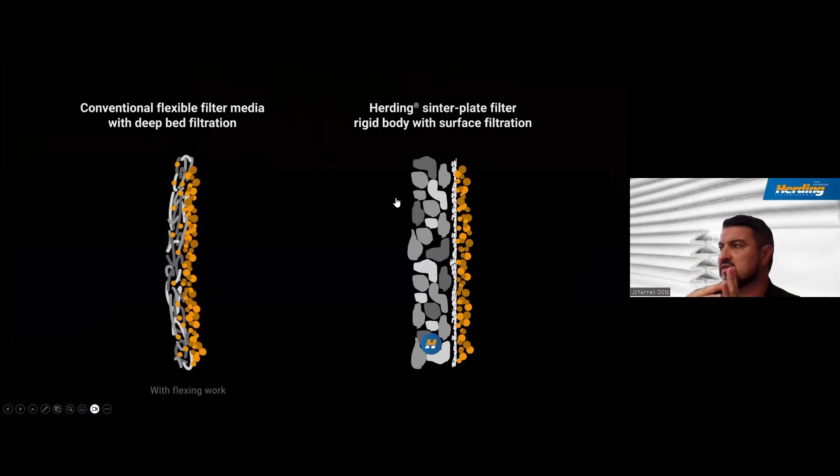Compared to flexible conventional filter media, we have no movement in the filter element, not during suction and not during cleaning. This means, first of all, there's no flexing on the filter media that will tear it up at some point. And on the other hand, it doesn't open up the pores so that particles can get into the filter media. So when we are doing the cleaning, there is no movement, but the dust is knocked off by an impulse of compressed air and will fall down.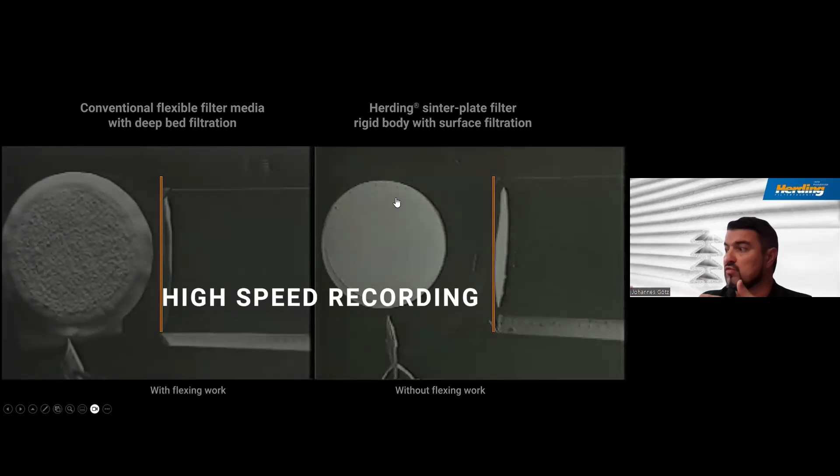You can see this in a real video. On the left side, you find the conventional filter media. On the right hand, the Herding sinter plate filter. You see the dust is just sliding down, not whirled up, and very, very well cleaned off the filter so that you get back to the same filtration pressure drop after the cleaning took place. So this means you have got stable conditions.

One thing very important about the filter element, as I mentioned for the environment, is to be able to recycle it. We have got here even better, we can refurbish it. This means you can return filter elements to us. We will remove the surface coating, apply a new one, and you get back an element almost like a new one, but on the old body.

And very important also, since the end of last year, Herding works only with PFAS-free filter elements. So the regulations in terms of PFAS are already covered with our elements. And this refurbishment process plus the PFAS-free properties give you a reduction of CO2 footprint. This saves for the environment, saves energy, saves costs, and of course reduces the waste needed for production of filter elements.

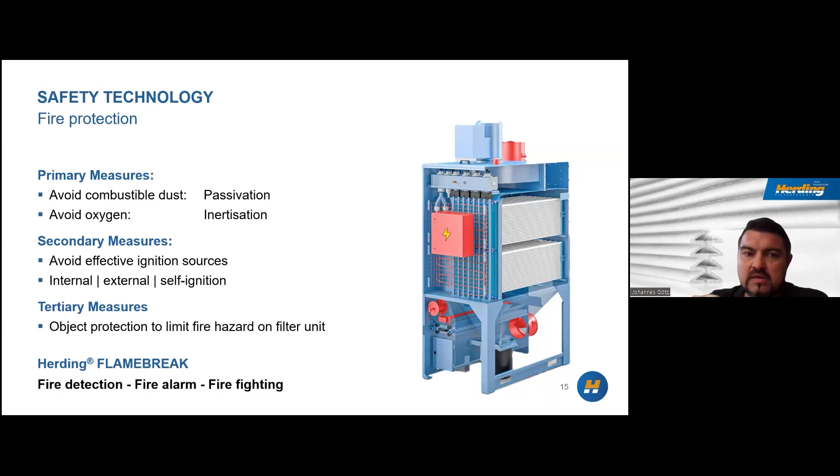Secondary measures are avoiding effective ignition sources from the filter unit, from external, but also from the dust. And the tertiary measures are constructive measures. This means we have a fire detection, alarming, and firefighting system available. Herding Flame Break works with a detection system based on heat detection cable. And if this is triggered and you choose the firefighting system with it, you can choose between aerosols or argon as an extinguishing agent.

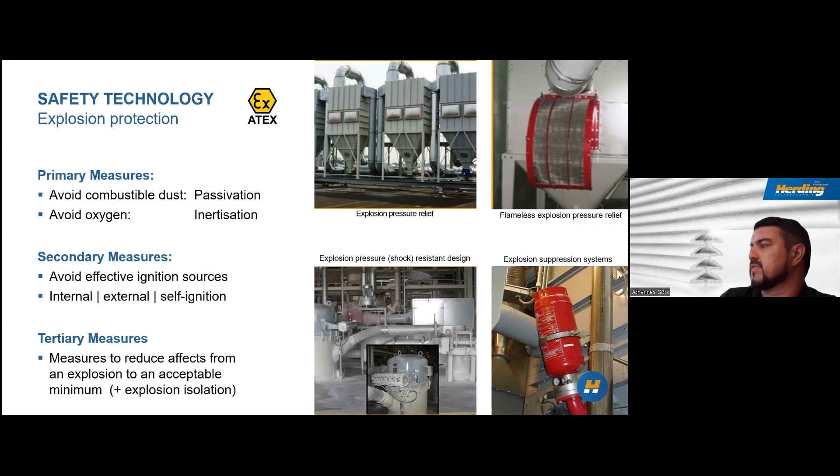Similar is for the explosion protection. I think I repeat here a little bit what Mr. Muschel and Mr. Nägele already told us. Primary measures, secondary measures, tertiary measures, same here. Avoiding combustible dust, avoiding oxygen, avoiding effective ignition sources. And when you talk about the constructive measures, there are different ways to handle this. The classical rupture disc, explosion panel, the flameless version of it, where you have the pressure relief into a quenching cage. You can use filter units that are fully explosion pressure proof or pressure shock resistant, and you can use suppression systems.

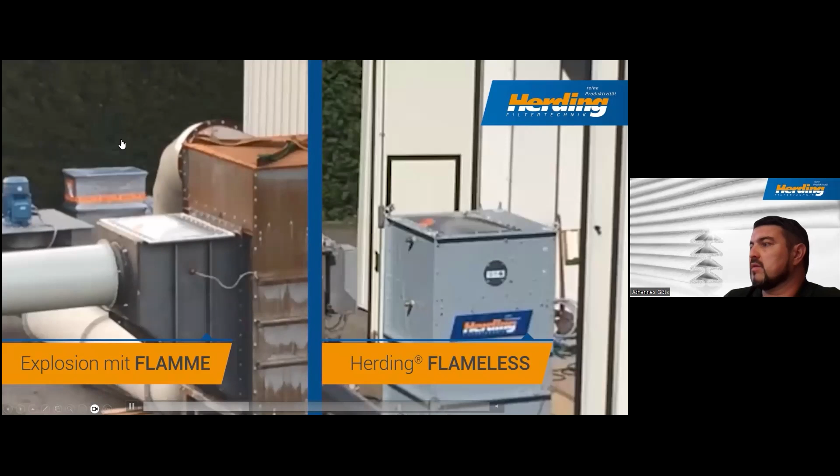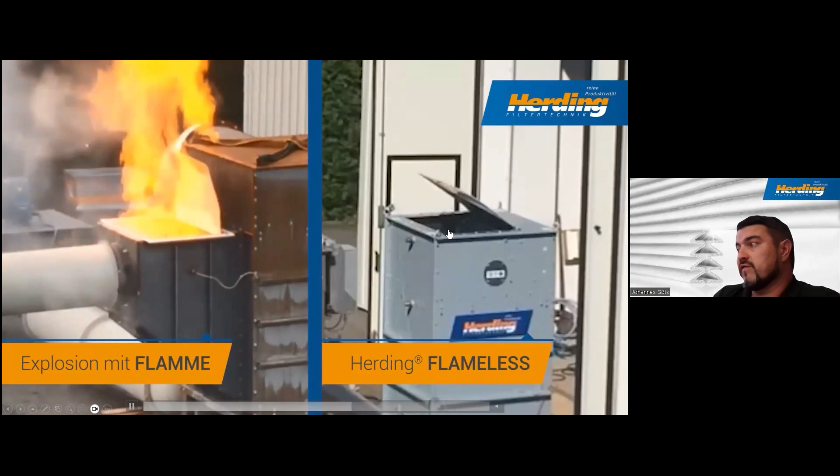And what I want to show you is one particular design that we have with the Herding sinter plate filters and their unique properties. They don't break, even in an explosion, or start to burn. What happens is we can vent on the clean gas side. So instead of having emissions of fire and flame to the atmosphere, we are going through the filters, so there's only hot air coming out of the filter. So this is Herding flameless. It's flameless, free of flame and free of smoke. So perfect for indoor installation, even for hazardous dust.

We also have to face what the previous speakers were very much focusing on, the hazardous dust and the different methods to protect the operator from exposure to toxic dusts. We have here also safe change with the classical BIBO design, bag in, bag out, but also the CLS systems, continuous liner systems, together with the Herding first rinse. A specialty: we don't have the bag in, bag out system on the first filter stage, the working filter stage. The plates are simply too big. We are working with first rinse. It's a washing of the elements before you can take them out.

And the whole system was tested by the ILU a couple of years ago, and we could prove exposure levels smaller than 0.25 micrograms per cubic meter during all steps of operation. We tested during operation, after operation, during service, during cleaning, and when we had an error on the system, and we could prove that it is smaller than 0.25 micrograms per cubic meter. So this is like OEB5 level from the tables we saw before.

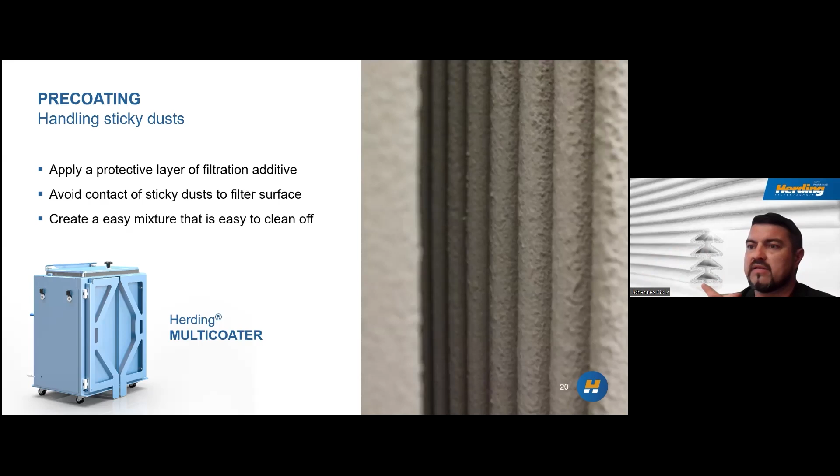The pre-coating, the system for handling sticky dusts. Sticky dust in the pharmaceutical industry is, for example, especially created when you have film coating. When you use acrylic resins to coat your tablets, this is extremely sticky and would clog filters very, very quickly. Our solution is pre-coating. With a small side machine, we apply a protective layer of a filtration additive, typically a mineral dust, on the surface of the filter, and the sticky dust hits that protective layer, not the filter elements.

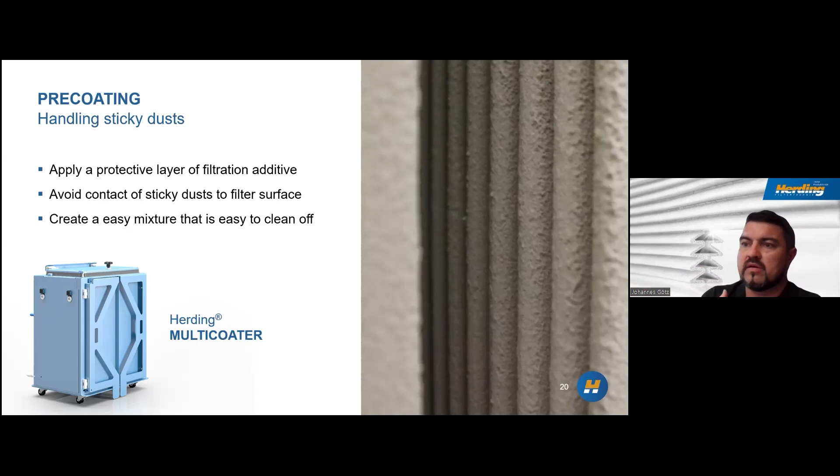And the cleaning system will easily be able to knock off this protective layer together with the sticky dust, and the system applies a new layer after that. So this allows constant operation even with very sticky dusts, and creates a lifetime much longer than usual.

Digitalization. We heard about Industry 4.0 already. Next step is, of course, AI. We are in there. What we can already offer here is we have our own control system, the Herding HC 4.0, that has got an OPC UA interface, so that we are ready to connect to other machines on a

defined interface. We are already doing this with a number of customers to get additional information that helps us to optimize the operation, to adjust parameters, to get better operational behavior. Just by knowing what happens on the incoming side, we can react on that one. This goes hand in hand with visualization and monitoring.

On top, you see one of the filter units we have got in our own production. We can visualize this on a web-based possibility. Flow simulation, also an in-house product from us now. We do it for our own filter units to optimize the design, but also when it's about to engineer for customers, ductworks, capturing systems, and so on, we can use the help of flow simulation.

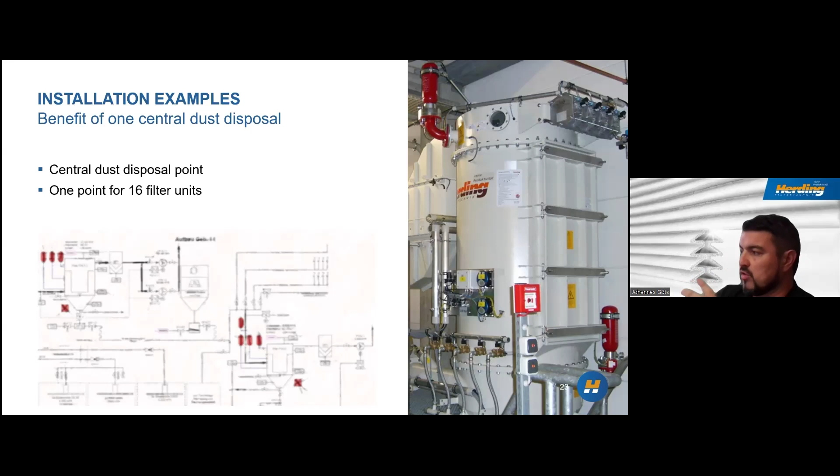Then there are 4 pictures on one page. On the left top, completely different from pharmaceutical. This is concrete block, very abrasive dust, very heavy dust, would kill the filters very quickly if you don't take wear protection on the housing.

Our filters anyway stand the abrasive dust without a problem because there's no flexible movement. It's a rigid body, doesn't move. The dust cannot attack the filter elements. Long lifetime here again. And you see here also the ductwork and so on that picks up the dust from the grinding, polishing places in the system.

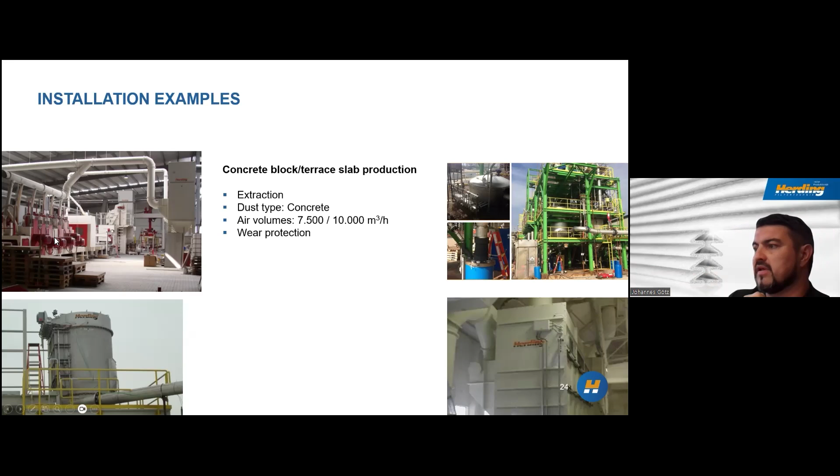Next system is crop protection units, pressure shock resistant 10 bars, very dangerous dust, crop protection, insecticides, pesticides, herbicides, with a dust discharge system by the customer that brings back the material into the building.

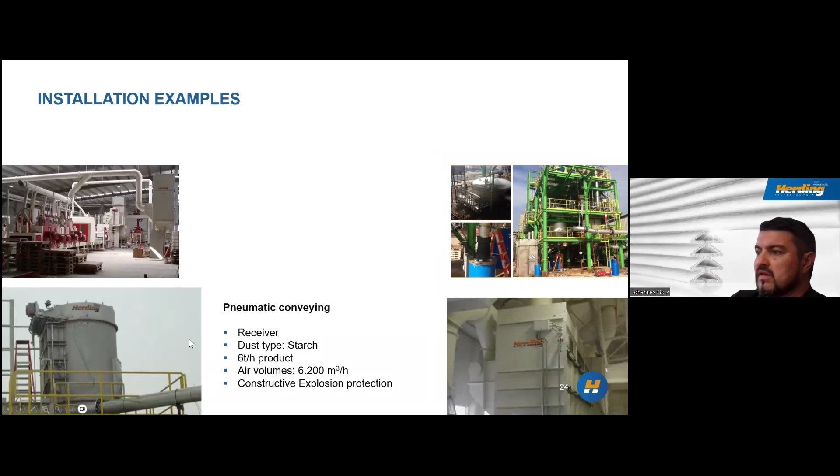Classical receiver on top of a silo for starch, 6 tons per hour product, 6,200 cubic meters per hour airflow with constructive explosion protection. There's a rotary airlock as an isolation to the silo, but this takes all the material coming from the pneumatic conveying system.

And finally, a bigger filter for almost 35,000 cubic meters per hour, 20 tons per hour of mineral dust, calcium carbonate, downstream of a mill and a classifier, and is a typical process integrated filter. This means this is just taking out the air from the mill and bringing it to the packing stations and to the classifiers. So yeah, typical process filter.